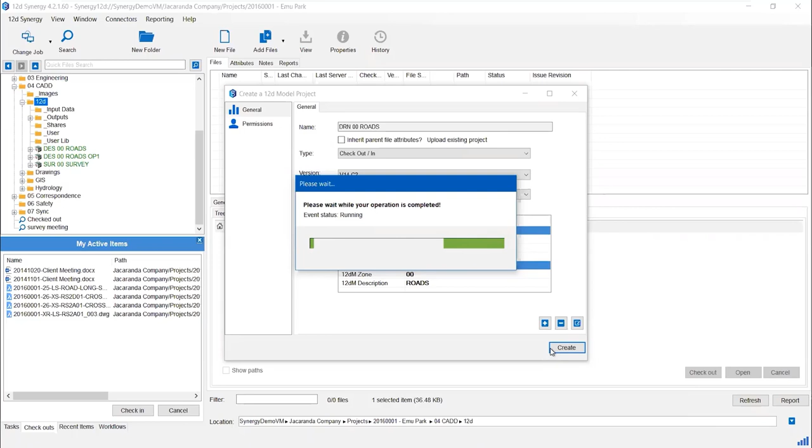Okay, that creates the project for me based on the template I'd already set up. It's up in my library already, and you'll see my project sitting there ready to go.

Another way to create a 12d Model project, if you already have one or multiples, is you've got a working folder all ready to go. You simply grab the project or projects and drag them into 12d Synergy onto the folder.

In which case the 12d Model attributes will kick in, and even though I can pick this 12d Model type, it's not going to force the naming rule on this one. This project already exists, so it's not going to use the project template either.

Once the project is in Synergy, I can rename it if I want to. To give you an idea how these other attributes work, if it's been approved, a person could click in here, put their name or use the Me shortcut button, then click the date field to put the date there, ready to go.

Hit set. As per normal, 12d Synergy will give me an upload preview to make sure the project's in the right location. At any point I can say I don't want to bring this folder over, hit the remove button, and it'll copy everything else over except that item. Otherwise, hit upload, and it'll copy the project into 12d Synergy.

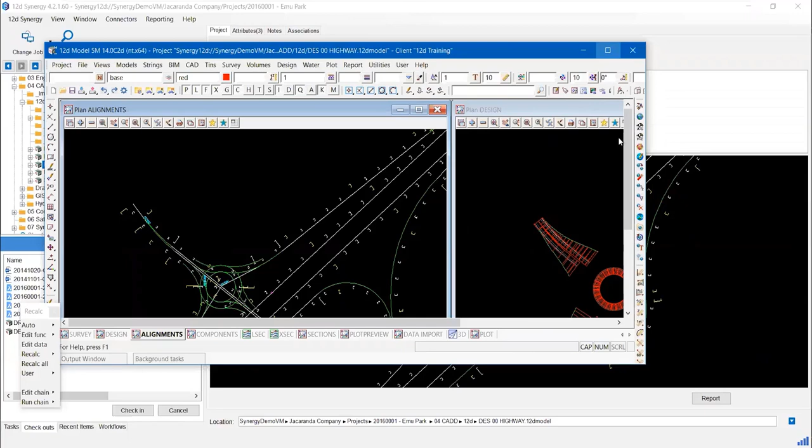And the project is finished opening up, and you can start work as per normal. It's important to know that it's really only the integration with 12d Model that changes here—all your tools and the use of 12d Model stay the way they normally do.

When you're finished doing work in your projects, you obviously need to save and close them and check them back in to Synergy. You can just do that the normal way—go project save, project exit.

Come back to your 12d Synergy client. You can then click on that project and select the check-in button. Now this is our wizard mode, so my administrator has given me some predefined options here that I can choose from. However, if they don't suit my requirements, I can always go to the manual description and type what I've done.

Bearing in mind that if you don't use wizard mode, your predefined options sit down in a drop-down list down below. Now, you also have the option to keep checkout status turned on, which means you can check your project in, but it will keep it checked out to you so you can keep working on it.

Note that on a managed folder check-in, you'll have your overview at the top as well. So 12 files changed, there's 2 new files. You can see changed by the orange color, green is new, and if you see it red, that's things that have been deleted.

So type your little history comment, and then you can hit submit.

Now, on the check-in process, it no longer transfers the entire project back to the Synergy server. It only transfers the files that have changed within the 12d Model project, reducing your data transfer. Likewise, when I go to check out that project again, because I already have the latest in my workspace, there'll be absolutely no data transfer required. It will just open up the project. If somebody else happens to open the project before I open it again, it's not going to transfer the entire project back down to my workspace, only the files that have changed within the working folder. So minimalistic data transfer from now on.

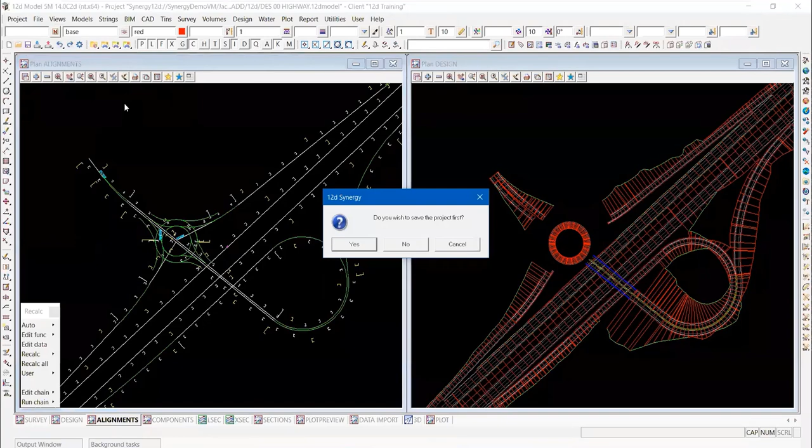Now, this one is more of a working update. So yes, I'll save the project. I'll do the manual description as well so you can see what's happening here. There's your overview at the top.

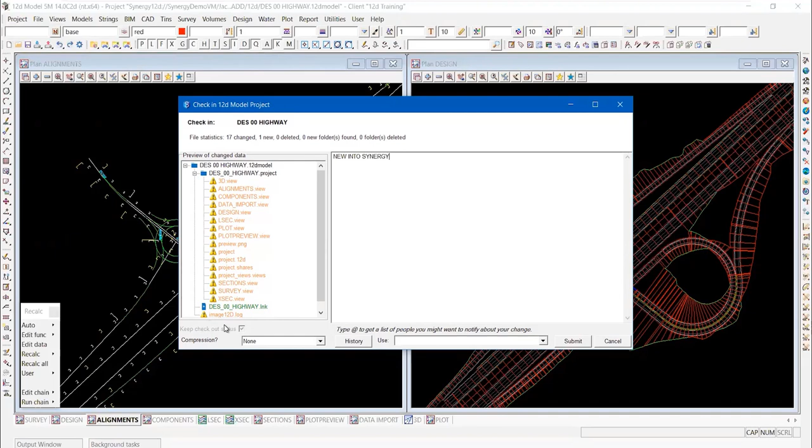New into Synergy, and you'll notice that my keep checkout status on this one is ticked on. I don't have a choice, it's a working update. So when I hit submit, it checks the project back in, or updates the server I should say, but leaves my project checked out and open so that I can continue working on it.

So that's handy if you're doing sharing. You might want to update the server so that people that are sharing your project can get your latest changes, because it's not until it's checked back in onto the server that everybody else can see your changes there.

Let's move on to have a little bit of a look about customization in Synergy. There are some different customization modes. The latest one that I probably recommend is the download customization on project startup.

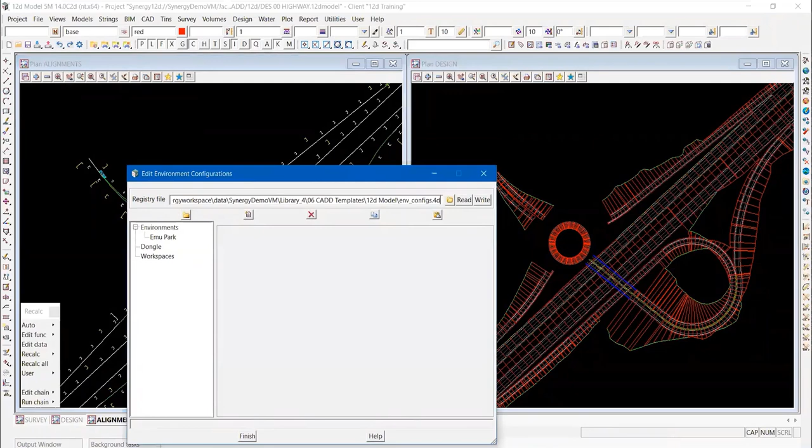And what this means is it uses a Synergy path. So if I was to look at my configuration and pick, say, my Emu Park one, it's using an environment file. So if we were to have a look in there, it's using synergy paths to point to those user and user library locations.

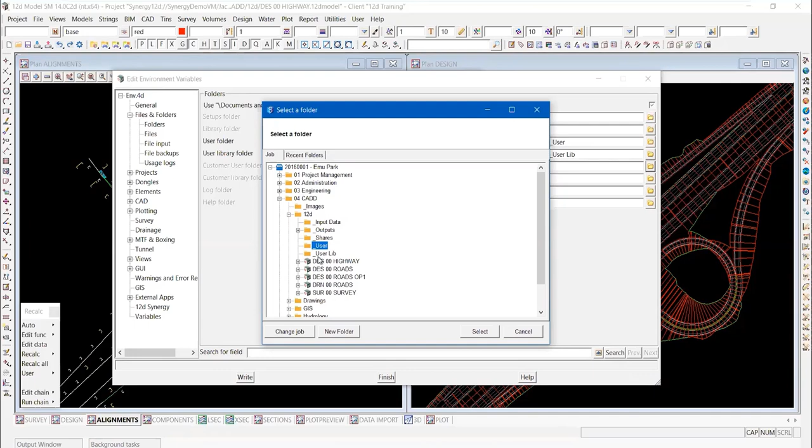You can do that just by clicking into your environment file or configuration, selecting browse, and coming down and going browse 12d Synergy. It will open up to your current job, but you can change job and browse to say a library, which your user libraries might be kept in. For convenience, I've got them in this project, so you can pick that there, go select, and it makes it a synergy path.

Now using download customization at startup means that when it looks at these folders, it will download those to my workspace when the project starts up. If I've already got them downloaded, there's obviously no download required. But say someone goes in and updates a setup file or a configuration file for whatever reason, it will check those and download the changes as and when required.

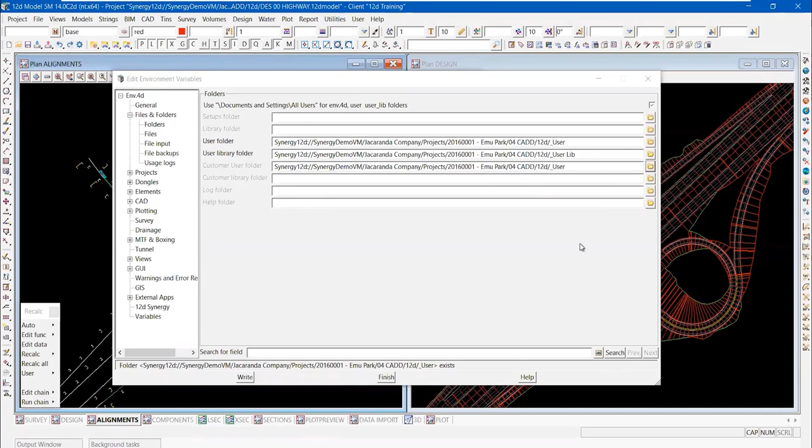Now, apart from the env.4d file, it means that as long as I have access, I can update any one of those configuration files from within the project. So I can say, for example, come and edit my names.4d file.

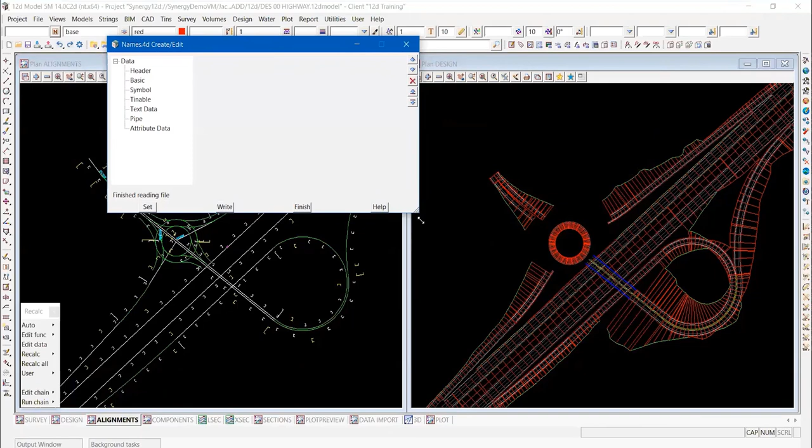In this case, I might come and put a new string code down the bottom here. Actually, I'll do a wildcard, put it in an unknown model, pick a color, a line, and we'll just go for a one line style.

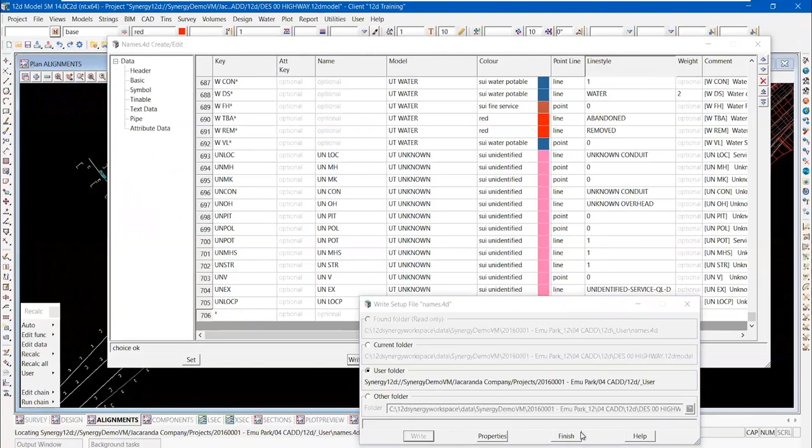When I go write, you'll see that I have the option to write back to the user folder, and it is synergy path. So when I hit write here, and then finish that one, I can come back to my 12D Synergy client.

You will see that in my user folder, my names.4d file has been checked out automatically, so I can make those changes. It will not check it back in, because it doesn't know when you're finished with it. So you will have to come here and check it in.

Do your description, so: unknown string added. Okay, and then you can hit submit, then everybody else will get the changes.

It's important to know, as part of the notifications, you can also use the @ symbol and start typing a name, pick it, and that will send notifications to that person to let them know that you've updated that file. You can do group names as well, like if you're using, say, designers or surveyors, you can type a group and everyone in that group will be notified too.

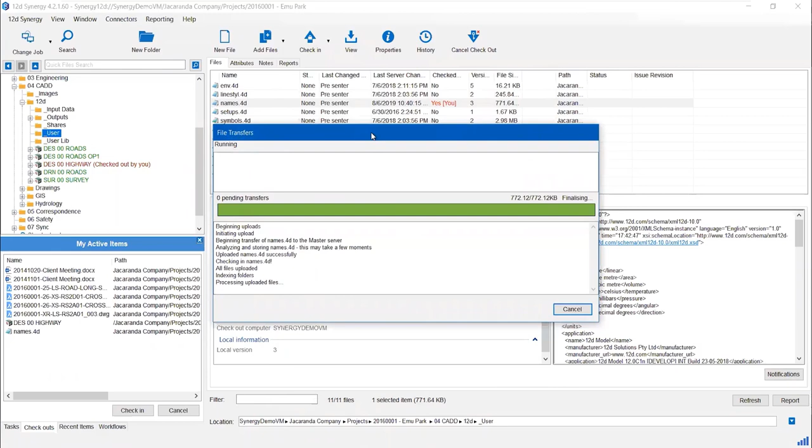We're going to hit submit, checks the names.4d file in, and now everyone has access to those changes.

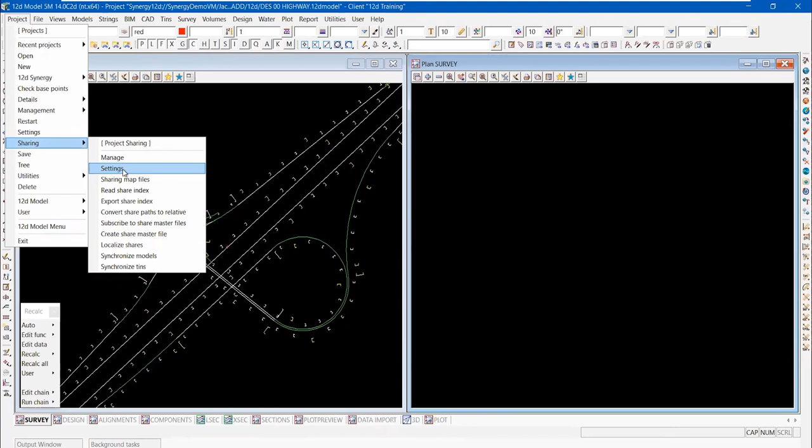Moving on to sharing from 12D Synergy, we're going to use the sharing manager. For this project, we're actually going to share the survey project in. Note that project sharing, you can use your manager from there. Settings as per normal, they still work in Synergy, so it will check on interval, and it will do the auto syncs as well if you have those set.

You can also use your manager from toolbars. Once again, you just come down to new project. Because I've opened from Synergy, it will default to Synergy. However, you can still share from a local or network location as well, but we just browse for the project.

In this case, I want the survey project. Hit select and set, adds it to the model tree, at which point you just come through and select what models and tins you want to share in. When you're ready, hit the add button.

You'll still get the yellow highlight that you used to, so that's all still there. Likewise with the tin, tick it on and hit add.

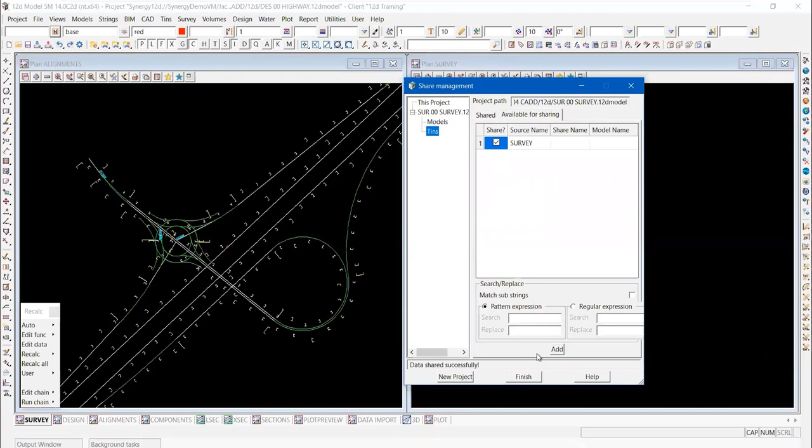Now we're not showing it today, but you can do master share files as well. If you're going to do master share files, I recommend just creating a share folder and saving your master share file to something like that location. Always better than saving it within the projects.

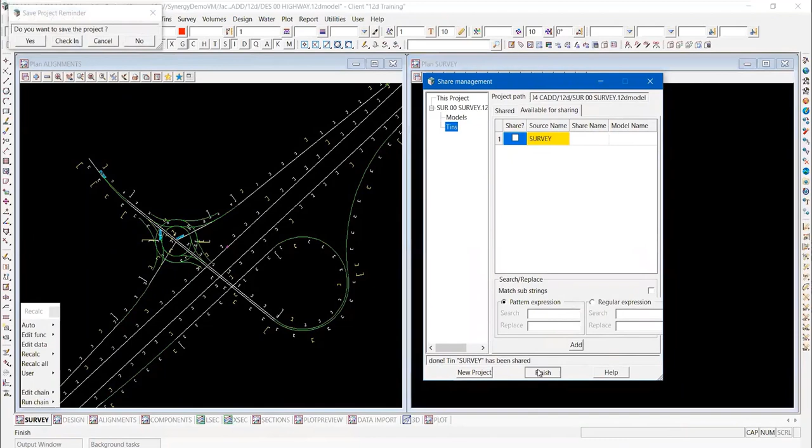Finish that one and you'll see I got access to all my survey models for sharing in. At which point I can come and save the project, going to close it down, and I'm going to check that highway project back in.

Put in my little comment and hit submit. And again, you'll notice very minimalistic transfers back to the Synergy server, only what's changed.

Another advantage with Synergy: often you close down your project and go, oh, I forgot to make my new models available for sharing, so you've got to open it back up and turn them back on. But with 12D Synergy, you can just right click on it, go edit 12D model project, select sharing, and you can just come and tick the models there.

You can also come in and tick the tins, so I want those two tins as well. And of course, make sure you hit save, and go OK, and then you can close that one down. So that's a lot quicker than having to open up the project again.

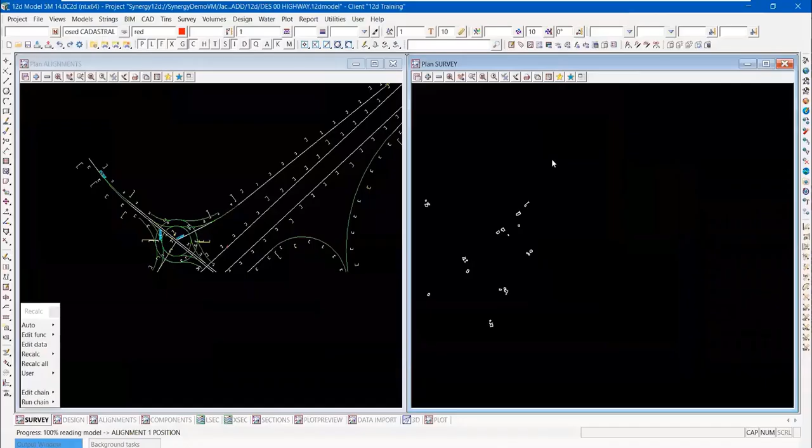First of all, we're going to look at reading data into Synergy. You can come up through the menu, go File, Data Input, pick your file type that you want to read in. You can also, in version 14, use the Quick Access toolbar to pick what you want to read in. So say it's a 12DA.

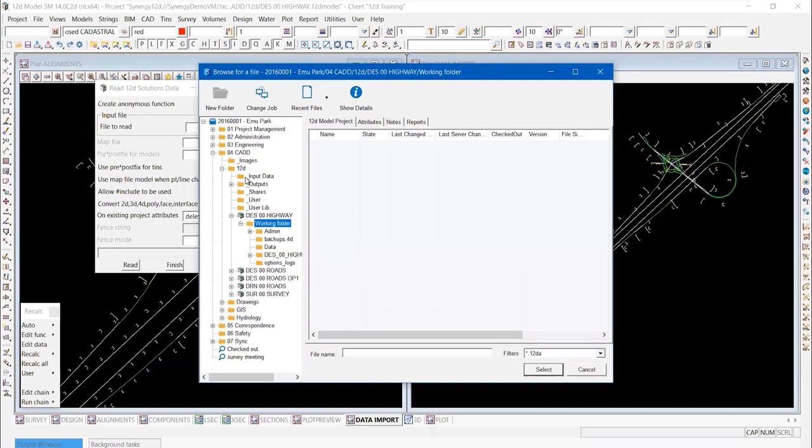You could then go File Browse. You have a number of different options here. You can click the browser there, and it will open you up to the current project. You can then browse up to a different folder and pick what you want to import and read those things in.

You can also just go browse file system as well if you want to browse to a network or local drive. So those options are all there.

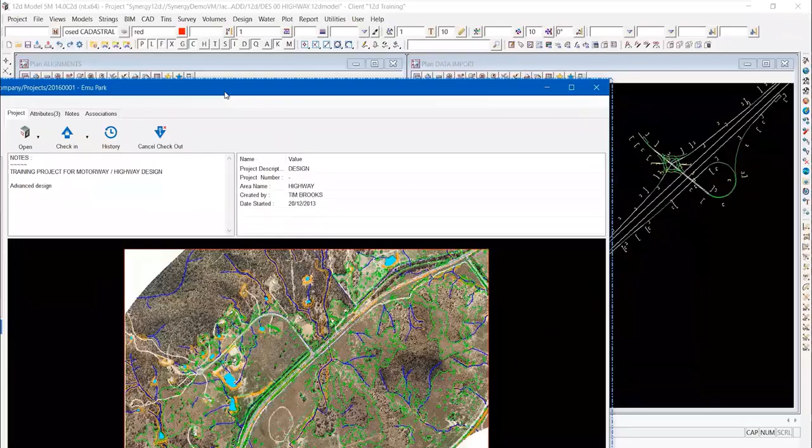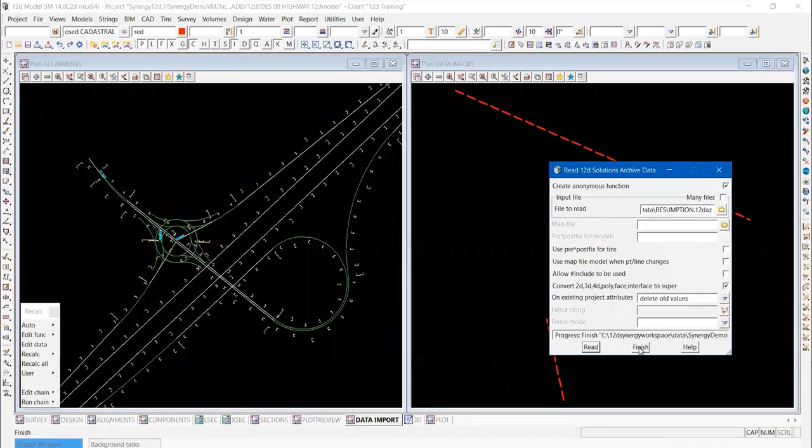The other option you have is if you've got Synergy open next to your 12D model project, or on another screen, doesn't matter which one, you can come and grab the file from in Synergy and use drag and drop. Make sure you pick the view that you want to read it into, release on it, and of course all you've got to do then is hit read and it reads the new data in. So drag and drop works that way as well.

All right, when it comes to writing out data, there are a few different options here. You can obviously go File, Data Output, pick any file type, doesn't matter which one. Or again, on your quick access toolbar, you can pick it from here as well. So again, I'm going to use the 12DA option.

Come and pick the data you want to write out. You can write your file name here, so it might be alignments. And of course you can come and hit write. Because you haven't browsed anywhere, that file is in your working folder. So you know if you check the project back in, that file is going to check back in with the project.

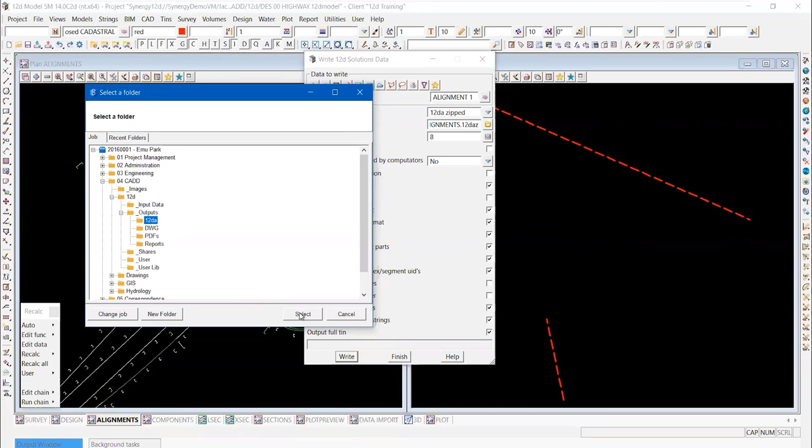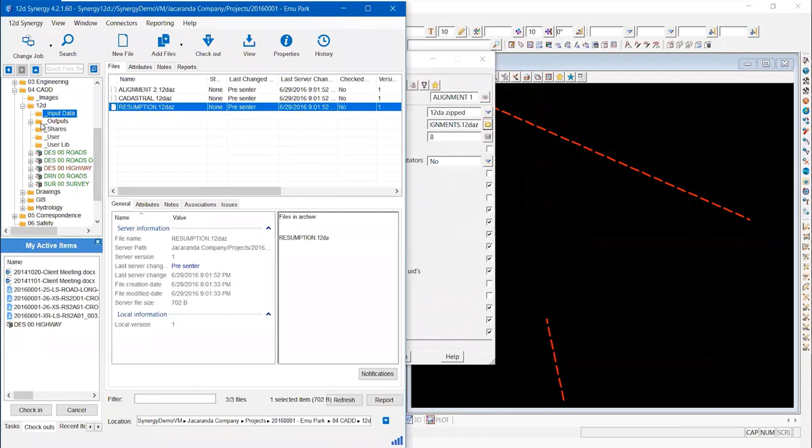However, if you want to move it from your working folder to a 12D Synergy folder, you just pick it here, come down to 12D Synergy, and go Add. It'll give you the job search, so you just pick the job or project you want to put it into, then select the folder you want to write it into. So there we go, outputs 12DA folder, hit select, and then you have the option to copy it there or move it there. So I'm going to go move and go new file. And you'll see now that that file is no longer in my working folder, but has been moved to my outputs folder.

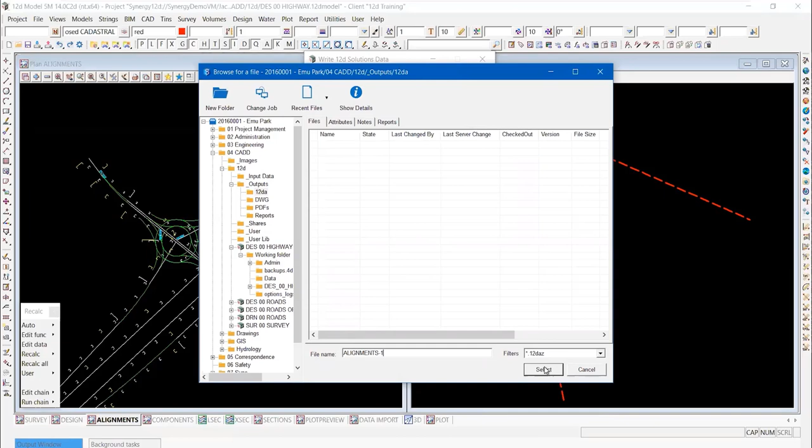The other option you've got is almost like a direct write to that folder. So where it says output file, if we hit the yellow browser, came down and selected browse, we could actually pick the folder we want to write it to straight away. So again, just pick that, come down, select a file name - I'll go alignments-1 just to make it different - and hit select. Now I can hit write here, and if I came back to the client, you'll notice that that file is not in that folder yet.

This is what we call a pending file, and often people forget about this last step. It's written it to memory - we've just got to check it in to put it into that folder. So when you're ready, because you might change your mind and go 'oh no, I need to add more data, write it again,' but when you're ready, come up to the project menu, come to 12D Synergy and go Pending Files. So any outstanding files in Synergy, you can just tick on here and check it in.

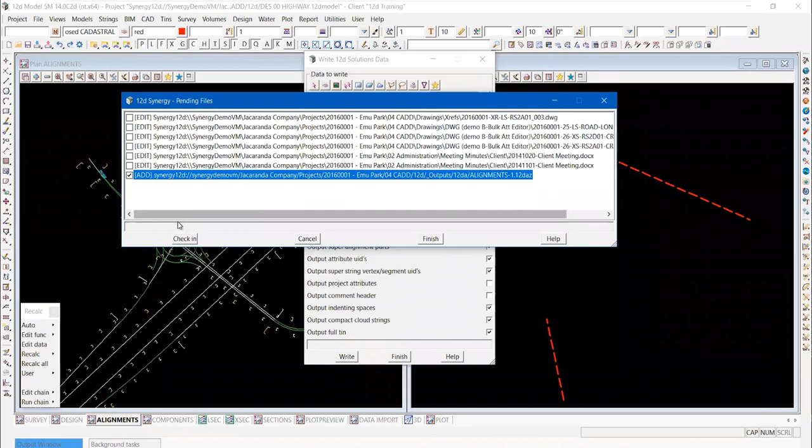Again, I'm just going to go check in - no longer a pending file. And if we check the client, it has been written into that folder. So just don't forget about that last step.

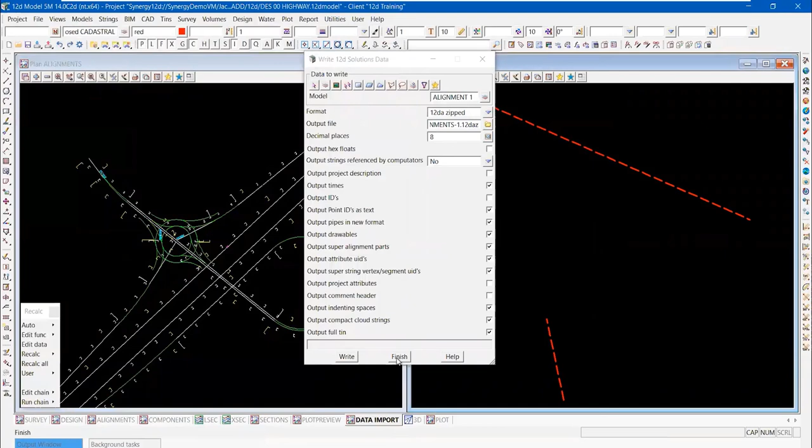All right, once again, just going to save and close the project down, and we're going to check it back in.

One of the options your administrators might give you is a predefined description. It might prefix it, but you might have to add a description too, in which case you type what you've done - could be like a 50% review or some sort of major update. Make sure you hit set and then submit.

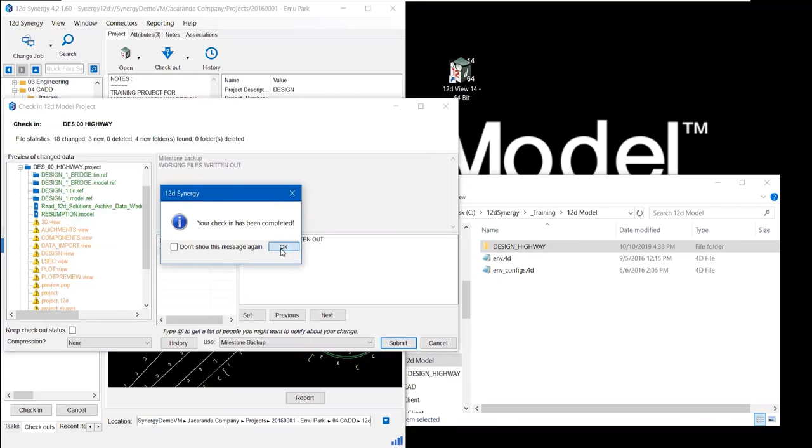While Synergy allows you to work from anywhere, sometimes where you're going to work might have no internet or very little internet, so Synergy has an inbuilt offline feature. This is more popular for surveyors than designers, because even if designers work from home, you normally have internet at home. So it's generally not a common tool used, but it depends on what access your company is going to give you at home as well.

So before you leave the office, you can check out your project or any other data you're working on - it doesn't have to be 12d Model data. You can then right click on it, come down to data out, and select the offline export option. Now, two options here: offlining is for you to go work offline and bring the project back into Synergy. Export is a one-way trip - it will desynergize the paths, like sharing and all that sort of thing, and creates like a pack and go package.

That project you can send off, say, to a client or someone like that, but it's not going to come back to Synergy - it's just a copy of the project going out. So in this case, we're going to go offline.

Now it will give you the option to choose what you want to offline. Most of the time it's just the project you're working on, so it's just this one. You can choose others at the same time, or your current project plus any projects it is sharing - this gives you the ability to add shared models whilst you're offline. Having said that, if you just choose this one, it still grabs any models or tins that have been shared in, as well as any customization, and creates a self-contained pack and go project.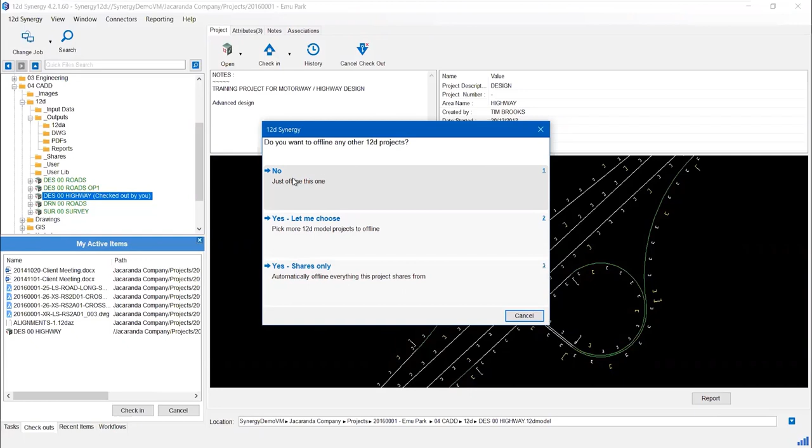So that's what we're going to do here - we're going to go no, and choose where you want to put it. I recommend you create a common offline folder so that you know where you're putting it all the time - you don't go home or out to site and think, oh, where do I put that offline data? Just put it in the same place every time. Go OK, and then it'll ask if you want to cache all the setup files and library data, etc. I'm going to go yes to that.

Go through, start making the package, at which point it will ask you to open the project as well - so we're going to open it. That's just so it can confirm what's in it, share-wise and customization-wise, to create that pack and go. We'll just wait for that one to open up. It'll pop up a little message soon saying pack and go has been created. There it is - you go OK, that closes your project back down, and you get the option to see it in Windows Explorer as well.

So there's the offline project that I can now go and use. You will see that the project is marked offline as well in the client. So now you can close down your 12D Synergy client, go out to site and work on that project, and you do that through your normal methods - you'd fire up 12D model as per normal now.

You would then browse to that offline folder - there's the highway project now, so select that. Select the project and go open. You don't need to pick configurations or anything like that - it's all contained inside that project now.

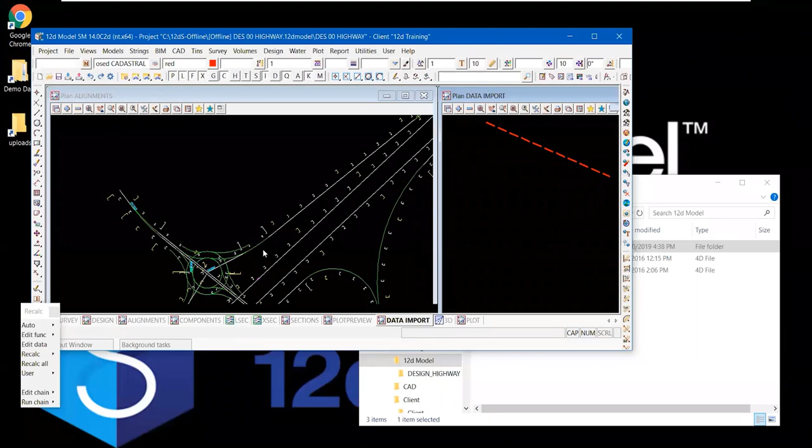All right, so you can just work as per normal in the offline mode. So for example, I'm going to draw a highly sophisticated box here. Okay, that's my offline work. So I'm finished out on site or wherever it may be at home - save it and close it as per normal.

I come back into internet range or back into the office, I fire up my 12D Synergy project client. Instead of browsing all the way to it, I can use my checked out items here, right click and go to - that'll browse me to the project automatically. You can still see it's offline. Now I can right click on it, come down to data out, and I can online the project.

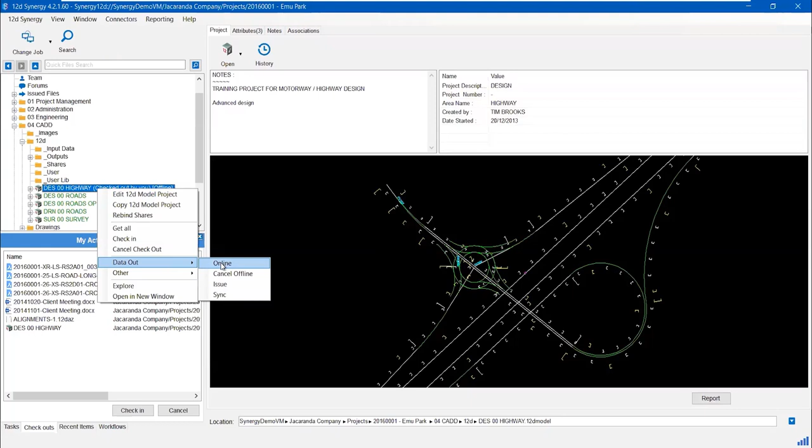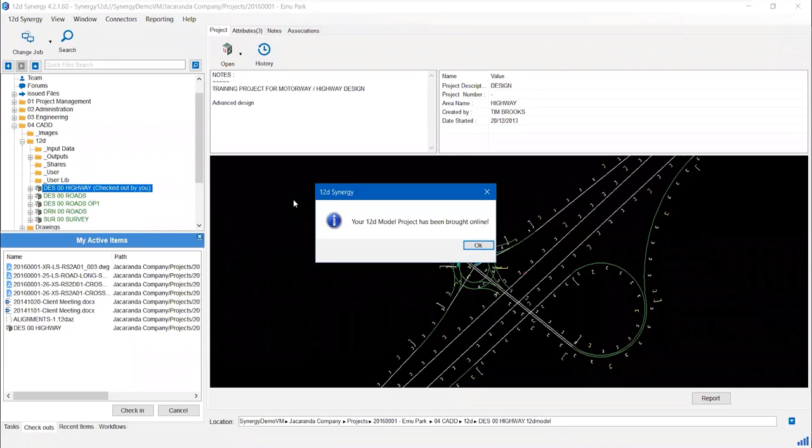If you haven't made any changes, you can cancel your offline as well. Okay, I'm going to go online. It'll ask if you want to replace the contents of your workspace location - yes, I want to do that. And I also, in this case, am going to delete my offline location so I don't have a duplicate, so I'll delete that one. And it replaces the contents of my workspace. So there you go, brought back online.

I can open that up now. You can see the box in my last active view anyway, but let's open that one up through the normal Synergy methods.

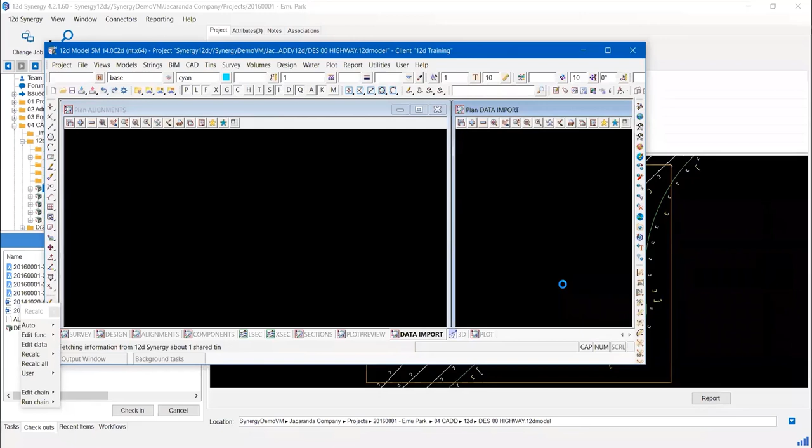And there we go, all my offline data is in there. I can do some more work now if I want to, or otherwise I can save and close it.

And I can check the project back in. So I'll go manual description and I'll go offline data added and submit that for check-in. There we go, that's all checked in.

Of course, with 12D Synergy, you have your history as well. So up here on the ribbon, if I clicked on history there, you can see all the changes made to that project. You can do a show preview. It's whatever view it was saved on at the time of check-in, so it may or may not help you.

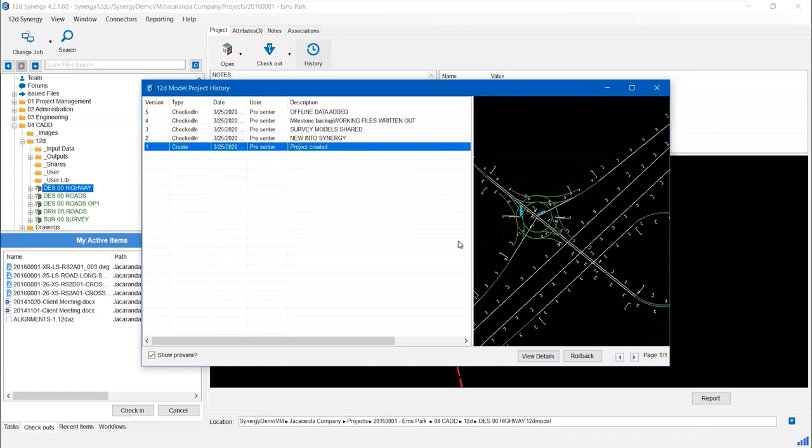But you also have options to do your rollback. Okay, so if you want to go back to a previous version, there's no longer any need to keep backups of 12D model projects anymore. You can just roll back at any point you want. As long as you make sure your descriptions are adequate, you'll be able to see milestone backup events and all that sort of stuff.

All right, also if you right click on a project and go edit 12D model project, under utilities you'll have access log. So this picks up any access, whether it's read-only or direct access. There's your history trail there as well. And the audit trail is the combination of both of those, so you can see everything there.

Under utilities, general, just be careful of this one. This is where you delete a 12D model project. Note the red writing, okay? Can't be recalled, it's gone forever. So be very, very careful of that one.

Couple of extra little things. If you right click on a project, there is a copy 12D model project there. So if you're doing options or just want to test something out, you can copy it. That does reset your project IDs as well.

That's handy. There's a manual rebind shares there too. So if you don't drag and drop your projects together and you need to rebind your shares, you can do it through that one as well.